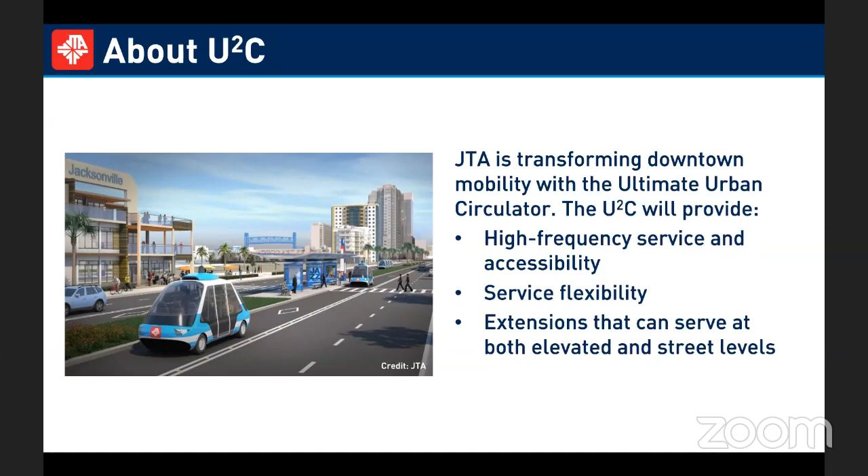This all resulted from the Skyway Modernization Program, a study back in 2015 where the JTA board decided that it was in the best interest of JTA and the city of Jacksonville to keep, modernize, and expand the Skyway. Some key objectives were to address system deficiencies. The vehicles have met their useful life, a number of them are no longer in operation, and it's become costly to maintain them. We're having to fabricate parts and figure out ways to keep that system running at the level it was.

Some of the feedback we got was that the initial Skyway didn't reach enough places, didn't go far enough into the neighborhoods or key attractions. So we looked at how we could expand that, improve the system, and make those modal connections, and ultimately how we can help the city drive economic development and support its goals for reinvigorating downtown. As a result of the study, autonomous vehicle technology was selected as the best mode to meet these needs, since it allowed flexibility for operating at grade and at an elevated platform. As we moved forward, we analyzed this further through a few FDOT and FTA studies, and we continue to refine the project through planning.

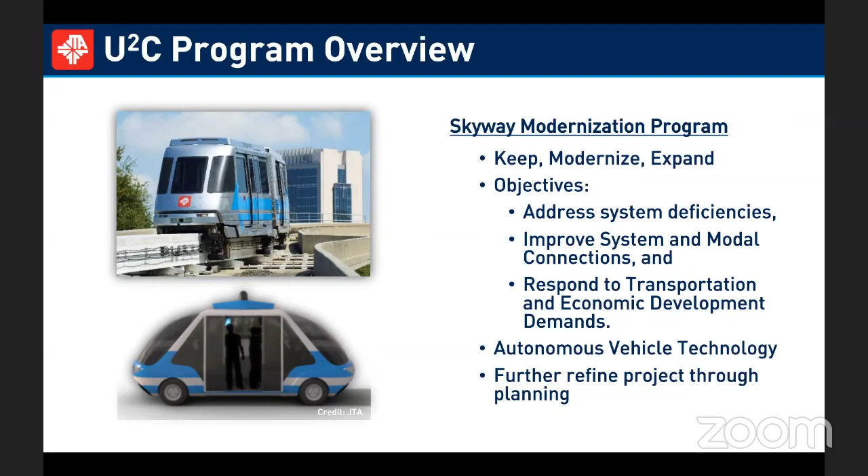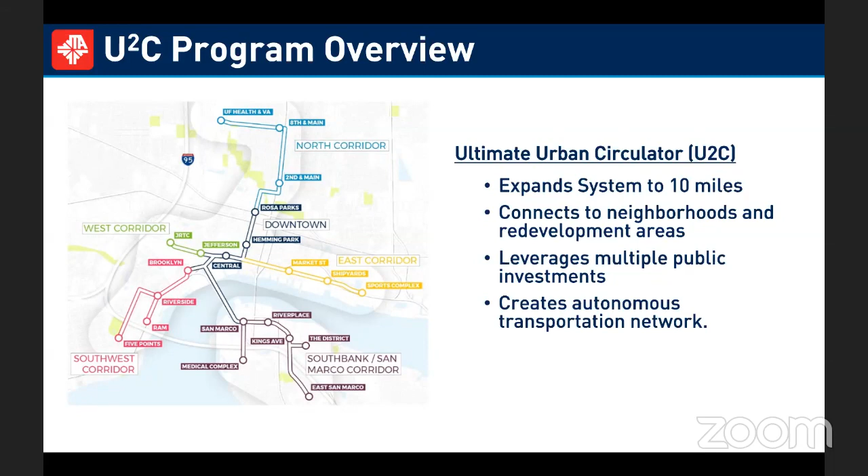So the concept takes the 2.5-mile Skyway system and expands it to a system that is roughly 10 miles, extending into each of the neighborhoods off the termini of the existing Skyway, connecting these neighborhoods to the urban core and downtown. It leverages multiple public investments, so the U2C will make use of the new Jacksonville Regional Transportation Center, as well as a connection through Rosa Parks, our previous transit station, and also supporting a lot of the city's investments in and around downtown.

So what we're here to talk about today is transit-oriented development. For those not familiar, some people have been calling it transit supportive urbanism recently, and it falls under smart growth. Really, it's a sustainable type of development that incorporates mixed uses in an area about a half mile, or a 15-minute walk, from a transit station. This allows that community to become a truly live, work, play area that you can function in without needing a personal automobile, putting an emphasis on transit as well as active modes of transportation like walking and bicycling.

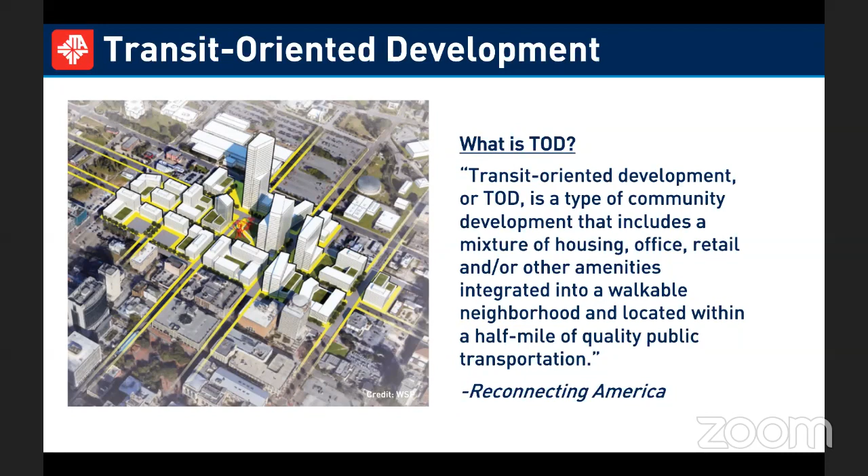We feel TOD fits right along with JTA's mission. We're trying to improve mobility in and around downtown and our surrounding communities. We want to create economic opportunity - there's an economic benefit to TOD, and capturing that to further increase what we can do with transit is a big aspect of it. And then also enhancing the community and creating sustainable development patterns.

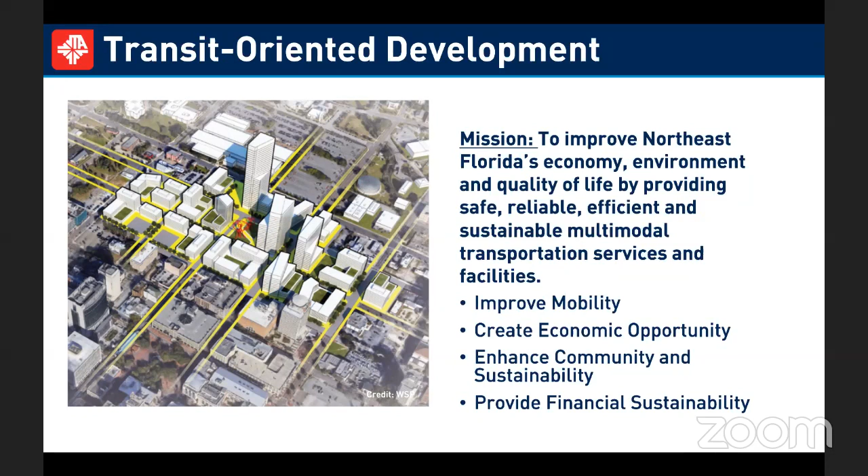Jacksonville has developed in a very unsustainable way, with urban sprawl expanding further and further out with development on green spaces. We really just want to utilize some of the underdeveloped assets that are in the core, and that will help provide financial sustainability for both JTA and the city of Jacksonville.

So this project kicked off in January of 2020. We had the project team come into town with experts from across the nation. We did some site visits, began a huge data collection effort, and began planning our public outreach and engagement process. From there, we took the data and began doing station area planning, selecting 6 stations to advance into further refinement and more detailed station area planning.

Now we're coming for our first round of public engagement. There'll be a few rounds throughout the process where we'll engage stakeholders and shareholders to get their opinions and feedback on what we are doing, incorporating that into future planning. And then finally, we'll finish up with an implementation report - the steps that Jacksonville and JTA need to take to make this plan a reality.

There's more information on the project on our project website at u2ctod.jtafla.com. On our website, you'll find information about the project, some videos about TOD, the features and some of the benefits of it. We go in depth about the corridors, and we'll continue to update this as we develop the content. You'll also be able to engage with us by taking the survey and providing feedback, plus other resources or the ability to contact us or request meetings.

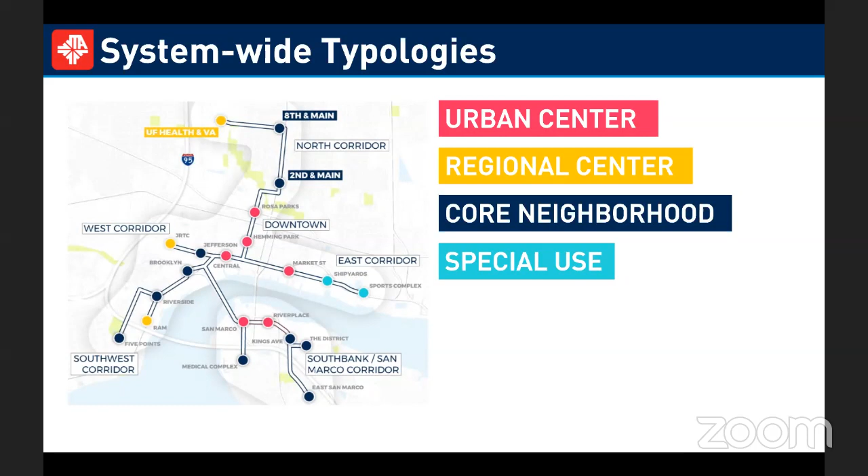So to talk specifically about our stations within the North Corridor, 2nd and Main and 8th and Main are core neighborhood places, adjacent to the central business district. They're primarily residential and less dense. Throughout Springfield, you have a lot of single family homes, but one common characteristic of a core neighborhood, and in this case a historic and urban neighborhood, is that historic urban fabric that's the organizing element for this area, differing from what we see out in the suburbs.

Usually a common characteristic is that it has a single or two commercial corridors, which provide opportunities for people within the neighborhood to get some of their daily needs met. We see that in Springfield, and we also see it in places like 5 Points.

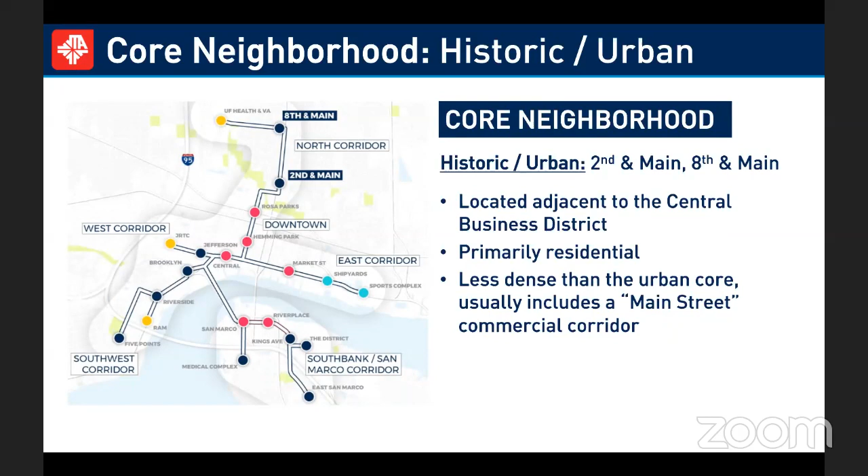So our final station in the North Corridor is UF Health and also the VA. It's also the northern terminus of U2C. This is a different place than 8th and Main and 2nd and Main. We've categorized it a regional center because of its focus and concentration of healthcare services, which not only draws people in from both the region and locally to utilize healthcare services, but it's also a major employment center. So we think it makes a lot of sense for a station like UF Health to be considered a regional center here.

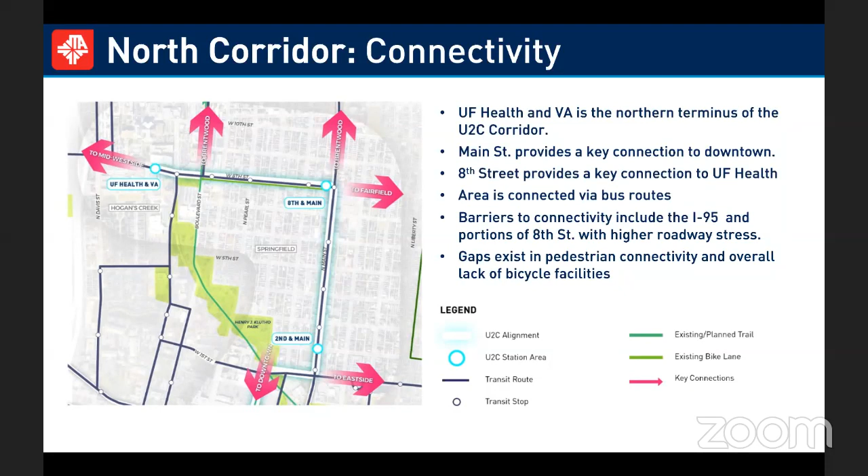So for these specific stations, we have given a score or ranking for what we think the potential for TOD is, and we've done this with four metrics. We look at this four ways: we take a look at each station and understand what the local leadership and support system is for that particular station and neighborhood; we look at the market strength, which our friends at HR&A have been providing foundational information for, to understand our starting point from a market perspective. Our work providing a vision for TOD has to balance both the realities of the market and really what the potential is to have TOD, provided the right conditions.

Physical suitability is really about whether there's property within the station area that could actually be developed for a new apartment building or a new commercial building, and that's both vacant parcels and also parcels that might have a building on it that's just underutilized.

And then finally, plans in place. Within the neighborhood, what type of plans have been put forward, it could be a neighborhood master plan, it could be an idea about an open space network. So we look at these four things and we organize what we find, and we look at their strengths and opportunities, weaknesses and challenges. I'm not going to get into the detail of the matrix, but that's really how we try to bring this information forward so that the team and the community can really weigh in on what we're seeing.

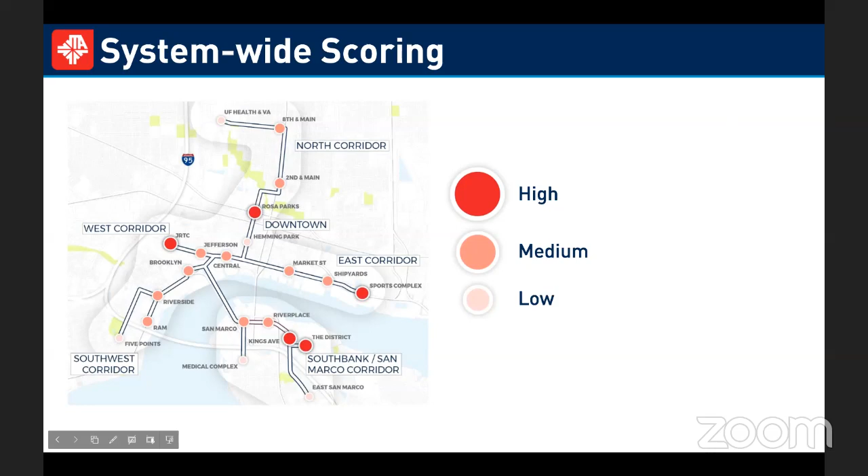So I want to just take the last part of this portion of the presentation and talk about 2nd and Main and 8th and Main in more detail. We'll talk a little less about UF Health. We'll put most of our attention on these two stations.

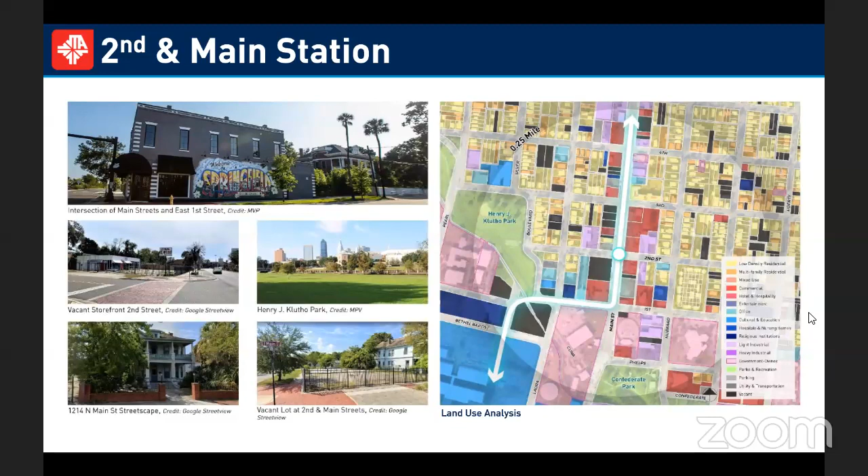So 2nd and Main, as I said before, has a good scoring. Where it didn't score so well was market strength, and we compared that to what was happening at 8th and Main, which I'll get to in a second, where there's a robust commercial corridor that could really be a catalyst or encourage new development to come online. But overall, we do think a station like 2nd and Main is certainly a good candidate to explore some transit-oriented development ideas.

So just to summarize some of what we're seeing and why we scored 2nd and Main the way we did: 2nd and Main is a special place for a station. It's a transition between downtown and really the gateway and the entryway to the Springfield neighborhood. We do, as Jamie mentioned, have the new development at Klutho Park. So that is happening within the station area, and that's a significant planned development.

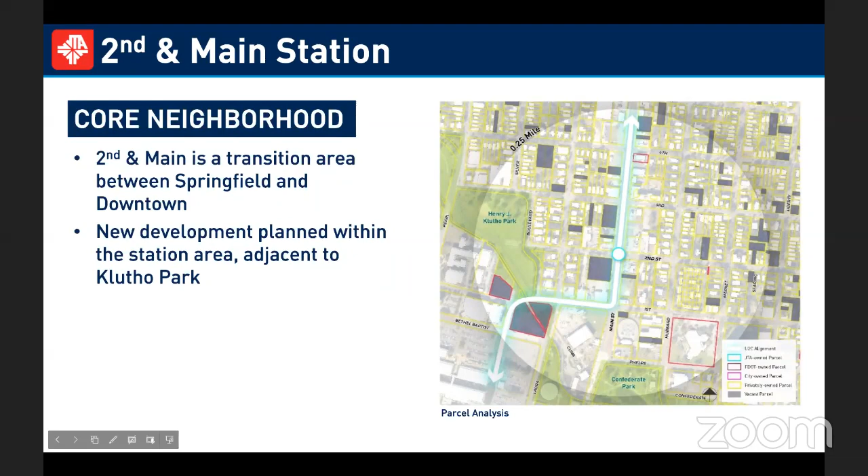So this image that you see on the right, this is really getting at what are the sites in the station area that could be where a new vision for transit-oriented development could occur. So there are quite a few vacant or underutilized properties or parcels right around the station area. We think that creates an opportunity to create a cluster of context-appropriate development that really fits into the neighborhood, new townhomes, smaller apartment buildings, really clustered around the station, having ground floor uses that provide community needs, dry cleaners, coffee shops, and the like.

But one thing that we do want to point out, and this is the same for 8th and Main, is that the property that could be available for transit-oriented development is in private ownership, and it's an important distinction, because certainly privately owned property can be realized for transit-oriented development. But sometimes we find that if the property or parcels are publicly owned, either by the city or JTA or FDOT, it's easier to get the momentum going and to make something happen on those parcels.

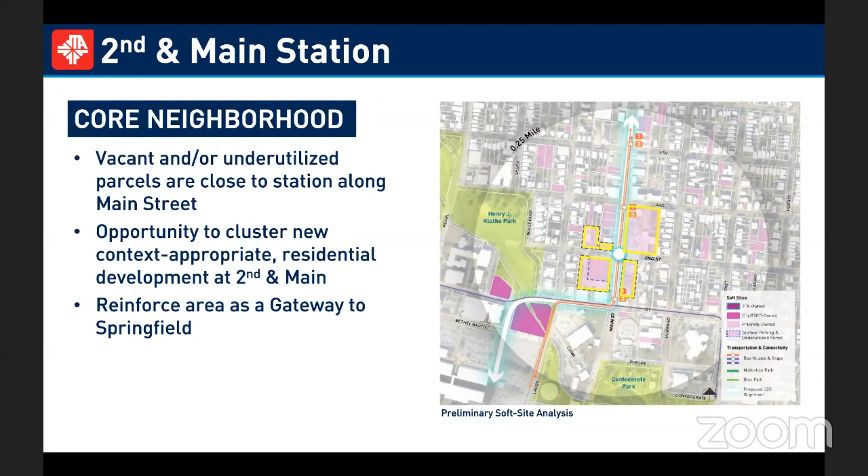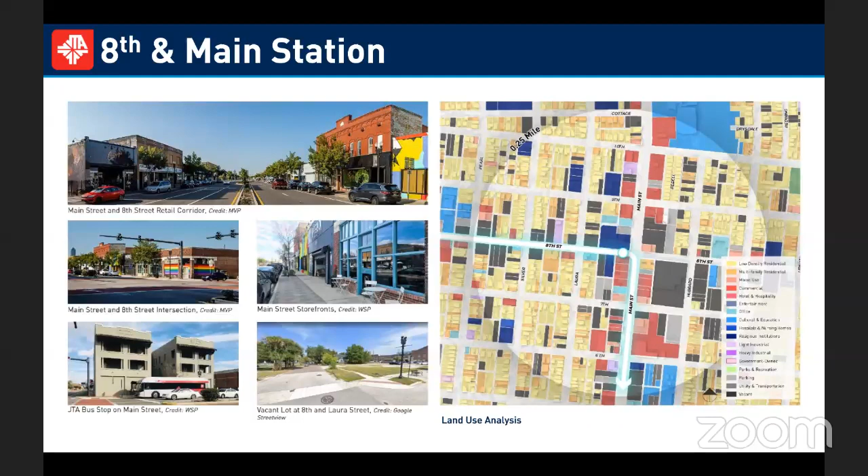I just want to reiterate that what we see happening along Main Street, the commercial corridor, is really something that we think should be leveraged. That commercial activity, the interesting shops and restaurants and bars, that's an attraction, and people want those types of things in their neighborhood. So that's something that we think could encourage new development that's a right fit for the neighborhood to occur around the station.

We also think that 8th and Main scored well. Different from 2nd and Main, we think the market strength is stronger here, again just because of that commercial activity that's clustered on Main Street.

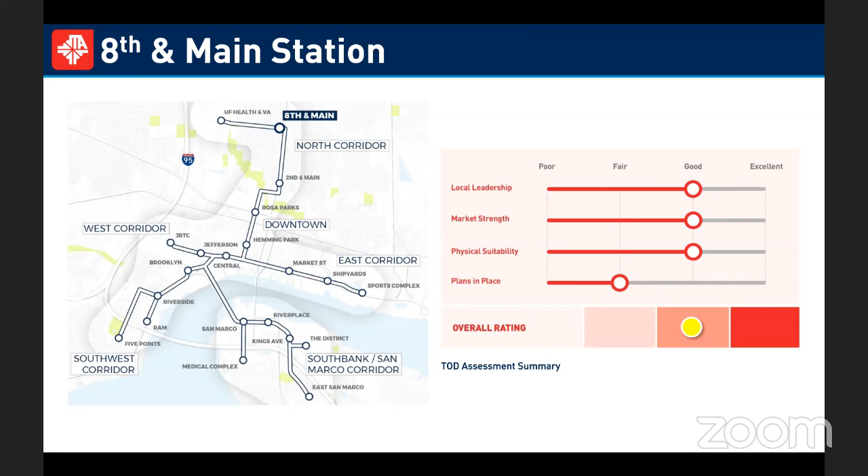Just some of our thoughts, summarizing how we're thinking about this station. The station does fall within the Springfield Historic District, so that's something to think about. Any plan that is put forward, we really would want the community, we would want essential stakeholders like SPAR to weigh in. The most important thing is that whatever is proposed or the vision is, it's something that you would feel belongs in Springfield and doesn't take away from its existing character, but builds upon it and further pushes the neighborhood forward.

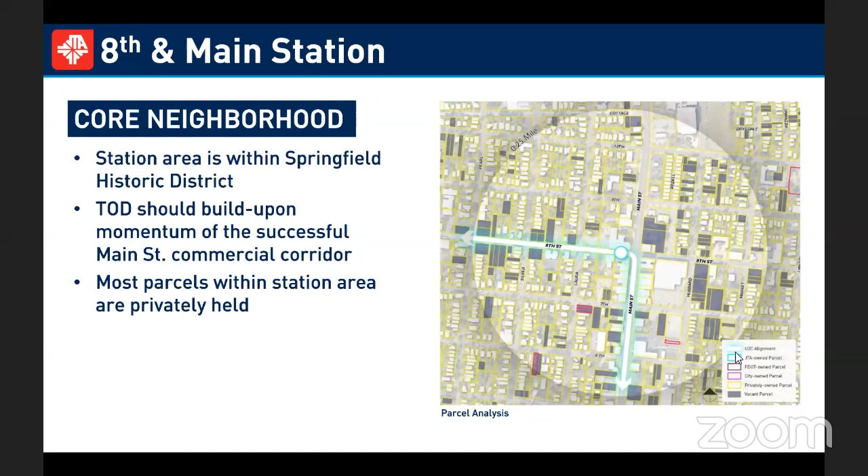Specifically at this station, right adjacent to it and just to the east of some of that commercial activity along Main Street, there's a vacant property, I believe it was at one time a grocery store. There's a significant assemblage of property just adjacent to the station that we're really excited to work with the community and stakeholders on, about what that could be within the context of transit-oriented development. And as I said, the community and SPAR are really essential to make sure we get that right.

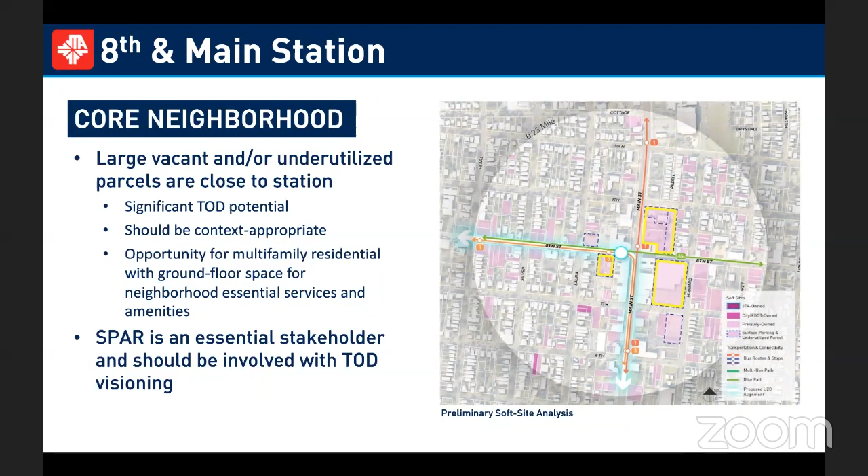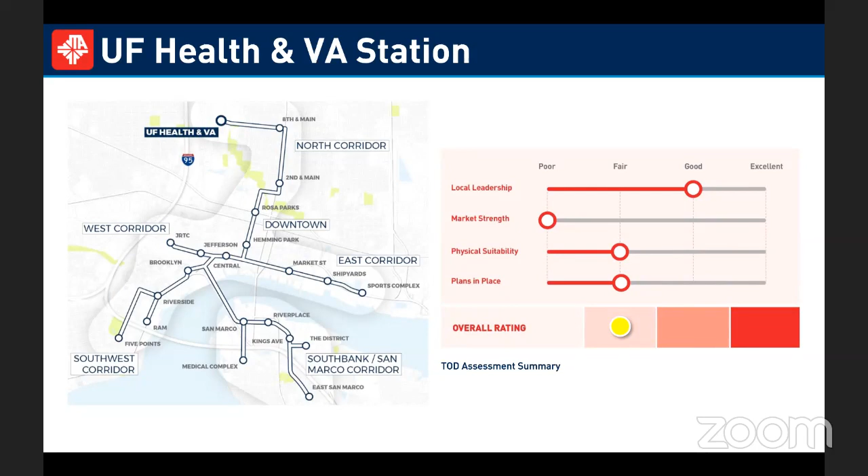Just to wrap up here, at UF Health it did score lower than some of the other stations. The reason why is that we think it's an existing employment center. We don't think there's a lot of easy opportunity for transit-oriented development to be realized. The large parcels that are there are surface level parking lots, and to do something else with those, you would need to make sure you could still accommodate parking.

However, within the context of thinking about the whole system, it's still a very important station, and it's great that there's a station there for U2C, so that this area can continue to be well connected throughout the whole system.

And with that, I'm going to hand this back to Alexander. Thanks, Josh, and Jimmy, thank you for that in-depth dive of the North Corridor.